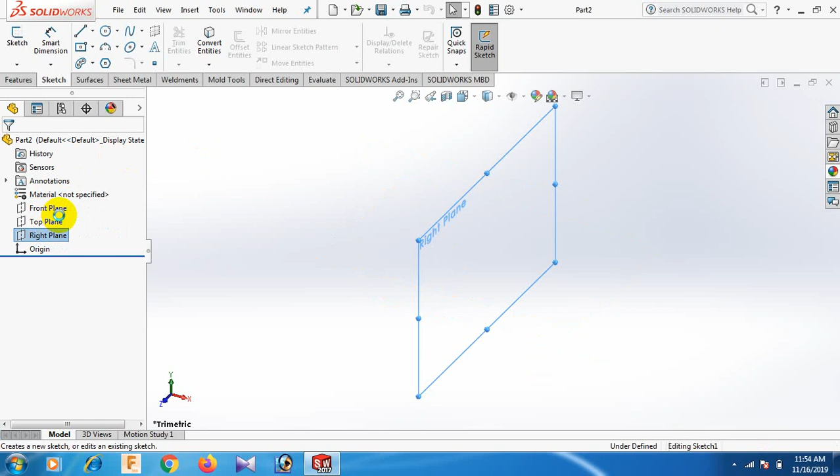Go to right plane and sketch. Draw the polygon to origin, select this line horizontal, and give the dimension of this line 50.

Select OK, go to feature and extrude. Extrude 20, OK.

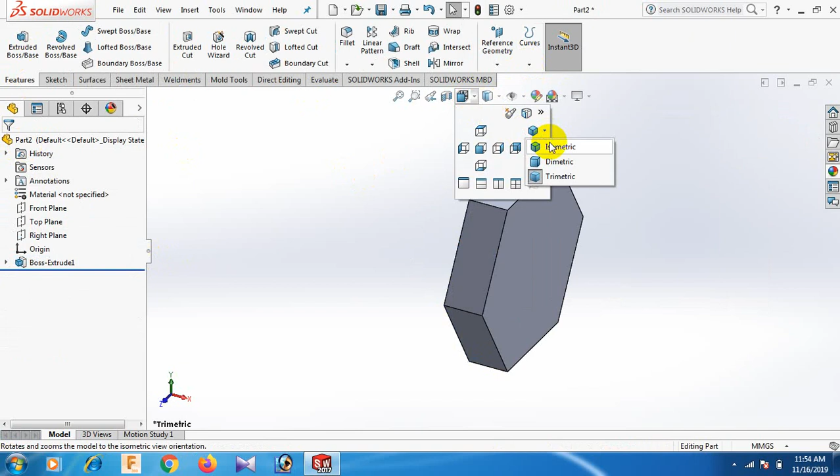Isometric view. Go to this plane and sketch, use the normal tool, and draw the circle here. Give the dimension 80.

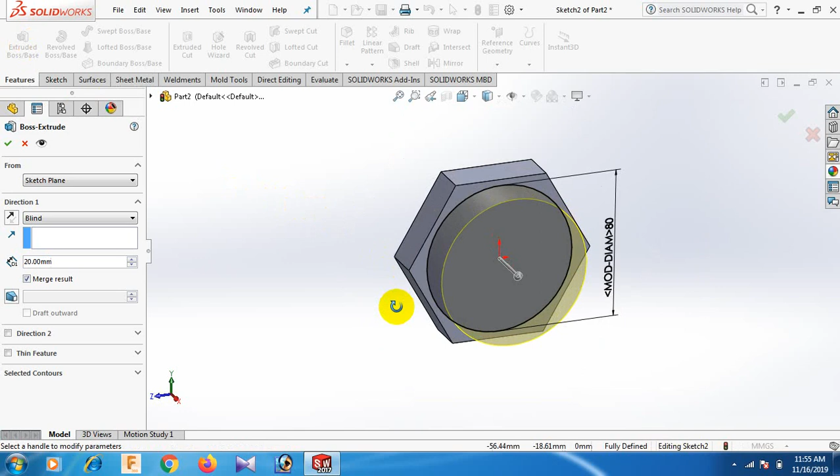Select, go to feature and extrude. Extrude here 100, and use 5 degree taper. OK.

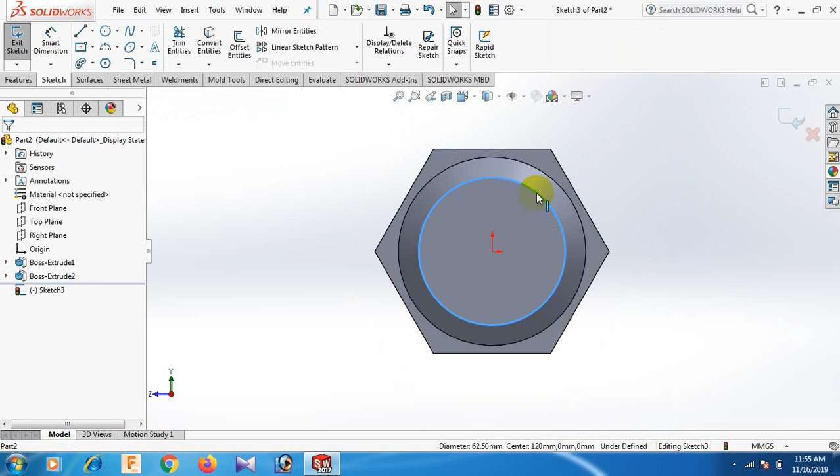Go to this plane and sketch, use the normal tool. Convert this circle into this. Go to feature and helix.

Reverse. Select pitch and height. Give the height 70 and pitch 10.

Use 5 degree here, taper outward. OK.

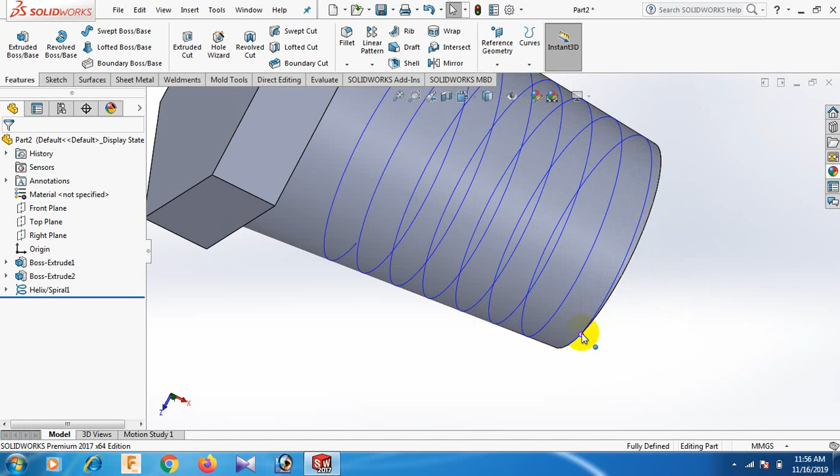Go to here, select point, go to reference plane, just select helix. OK. Now go to this plane and sketch.

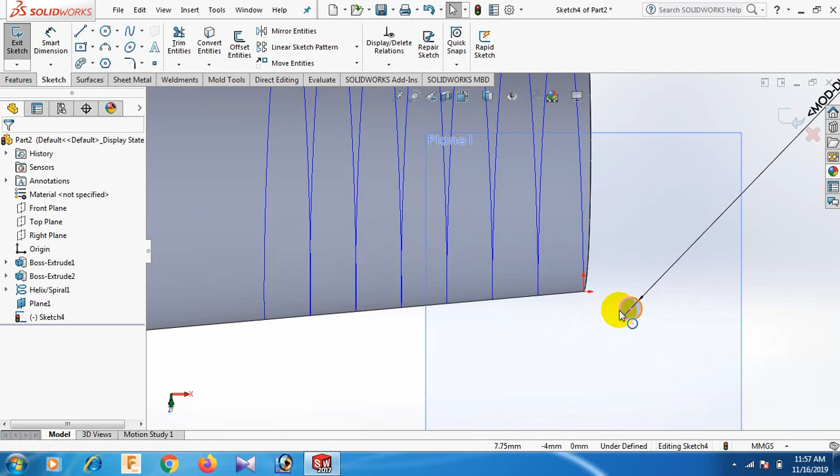Go to normal tool. Draw the circle here and give the dimension 5. Select, and this point controls this helix pierce.

OK, go to isometric view, feature and extrude cut, reverse cut.

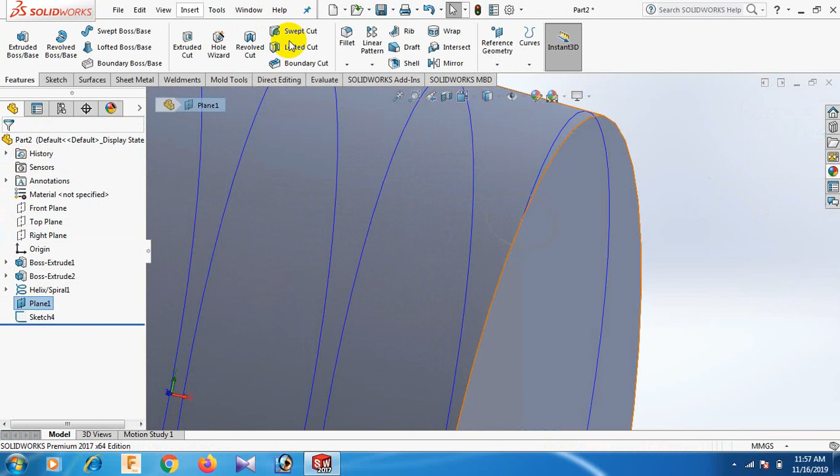Here select, OK, go to exit. Now select sweep cut.

Select this box as profile, here select path. OK.

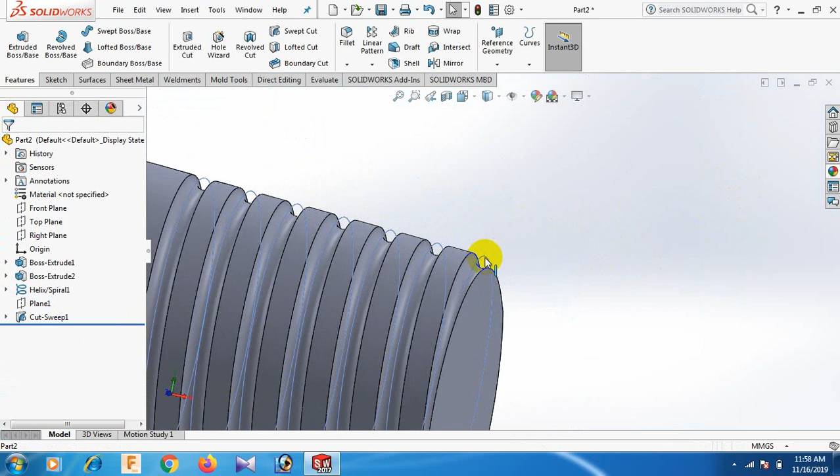Go to this plane height, and this helix height. Now go to isometric view.

We can use the shaded tool. Now go to file and save as desktop assembly 1.

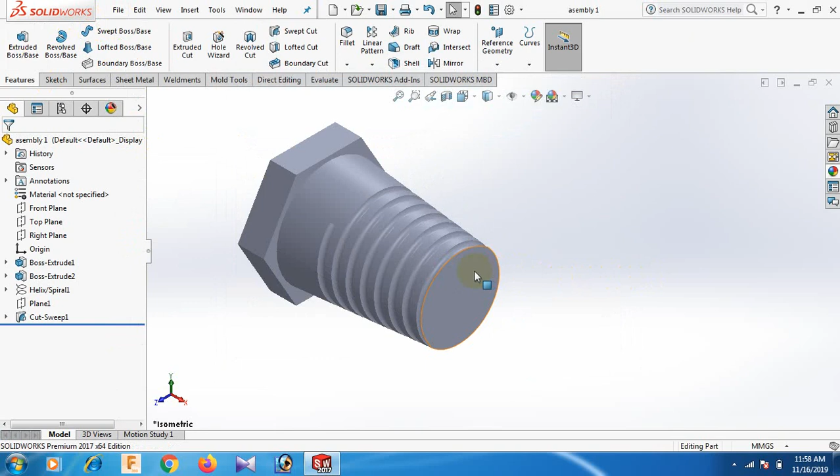Go to this plane and sketch, go to normal tool. Again draw the helix polygon, select here and here, and give the dimension of this line 50.

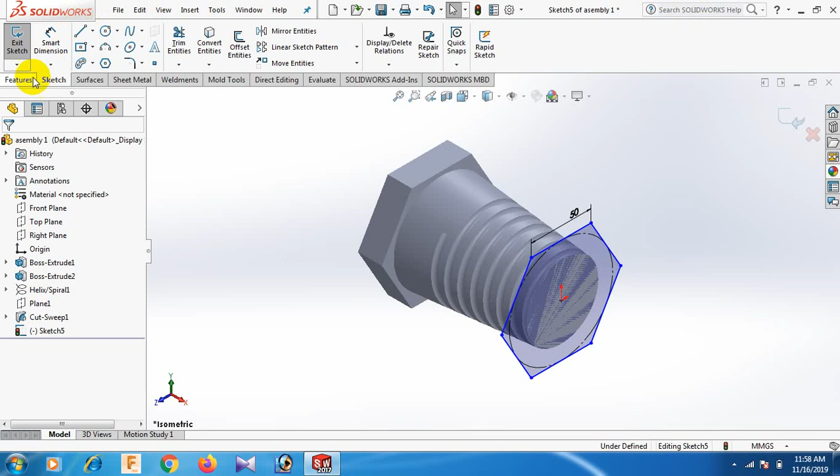OK, select. Go to isometric view again and feature, extrude 20, reverse. Just use degree 5 and draft outward.

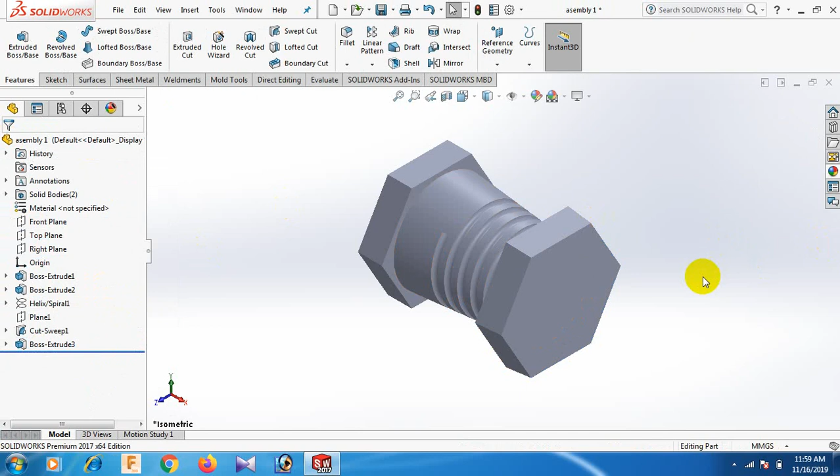Undo the marks. Now go to direct editing, combine, subtract, select. Here select first body and here select this body, show preview. OK.

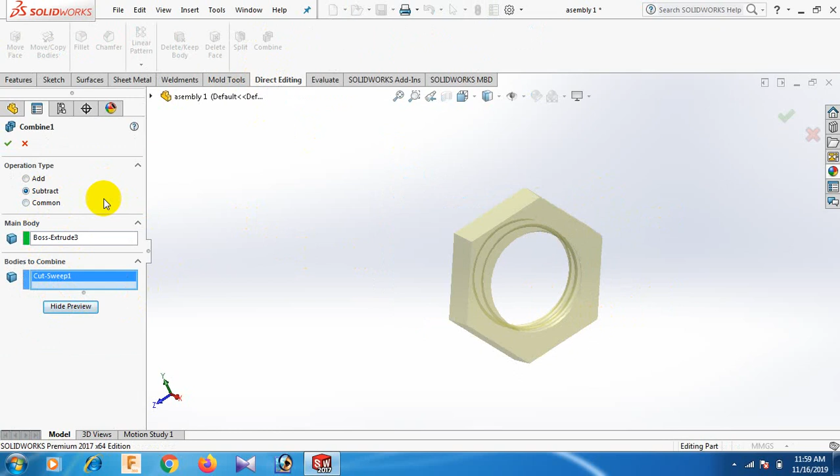Now go to file and save as assembly 2.

Now go to file again and new assembly part. OK.

Go to here, select browse, assembly 1, control, assembly 2, open. OK, and OK.

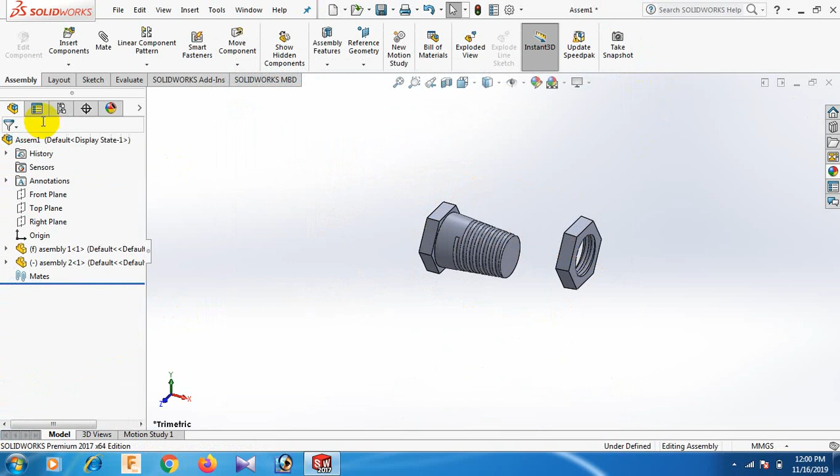Now go to here, select axis, this axis, mate this axis. OK.

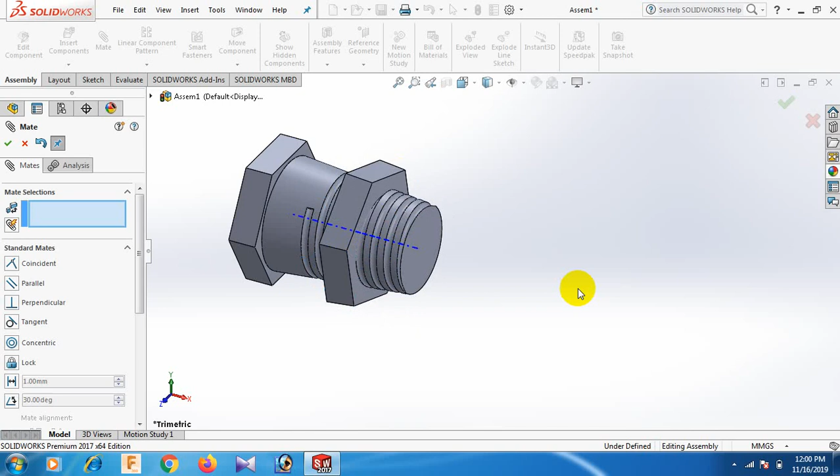OK, now use the shader tool. Here select metal, solid metal. Solid.

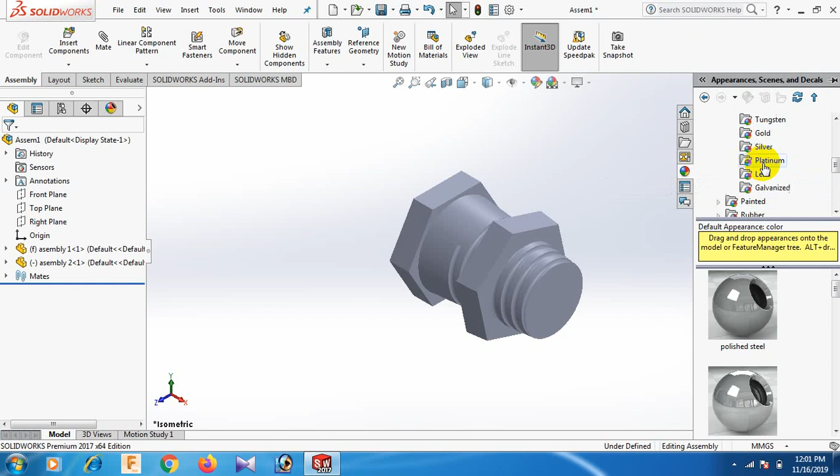Now you can use any color. Select here again. OK, make our job.